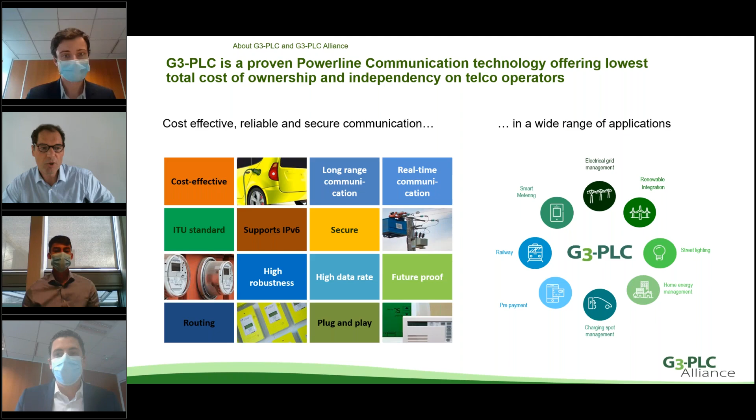On the right side of the screen, you see a couple of application areas for G3-PLC. As you probably know, G3-PLC was developed for the mass rollout of smart meters, and the main application still is in smart metering. But G3-PLC by now is being used in many other applications, such as street lighting, EV charging systems, home automation, and for example, also in railway solutions, in smart railways. And we will be talking a lot later on in this presentation about G3-PLC and smart metering.

And it's also being used to control safety lighting in tunnels. And in Italy, G3-PLC is a standard required by the Italian railway infrastructure company. And we have several members in our alliance from Italy working on these types of applications of G3-PLC.

And another example is Panasonic. Panasonic is also a member of the G3-PLC Alliance, active in this field. And they are using G3-PLC to control the lighting of railway platforms in several stations in Tokyo. So this is an example of one of the other application areas for G3-PLC.

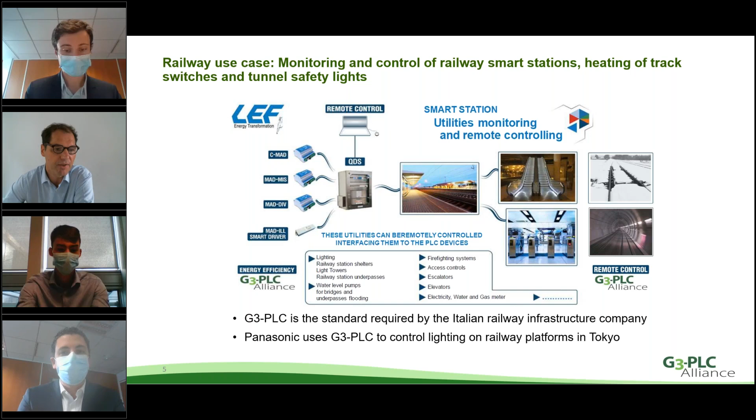Back to G3-PLC technology, G3-PLC embeds all the modern features for a long-term network operation, and it was designed for harsh network conditions. It's a very robust technology. It operates at low signal-to-noise ratios. It works with different modulations depending on the conditions in the network.

And it is self-healing, meaning that when there is a breakup or a change in the infrastructure of the system and the communication line is broken, then the nodes in the system will automatically identify this and will find a new optimal route for the communication. So it will self-heal the communication network without any interference from outside.

G3-PLC communication can easily cover several hundreds of meters, and we even know about examples of kilometers covered by G3-PLC communication. It supports high data rates. It has embedded state-of-the-art security in the protocol. It supports end-to-end IP communication. It is IPv6 compliant, and also important, G3-PLC is an open international standard recognized by the International ITU organization.

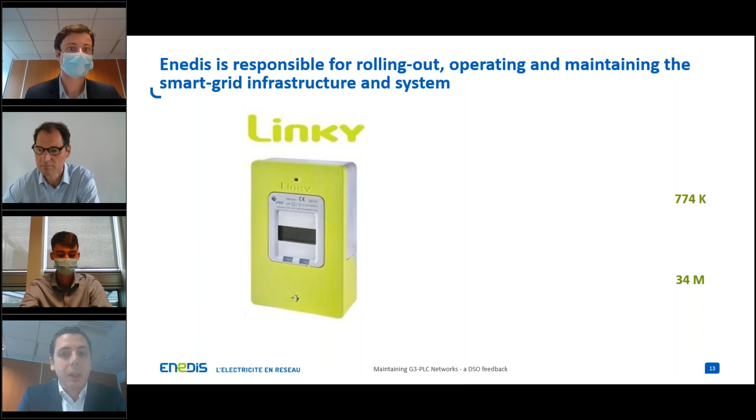Inside Enedis, Linky is the smart metering program. This is a large-scale rollout of 34 million smart meters using PLC G3 communication technology. The rollout started in 2015 and should finish in 2021 as planned. As of today, 28 million meters have already been installed at the end of last week, and 86% of the concentrators also.

We just wanted to highlight that for a massive rollout of PLC G3 smart meters, Enedis adopted a leopard pattern strategy. It means that first we install the concentrator, and then we install the meters quickly on that area to have a good saturation level and to have a good communication performance.

Also, before rolling out, there is no need to have specific noise measurement or network engineering with PLC G3. It's useless, so it is quite plug and play, in fact. And what we see is that PLC troubleshooting is usually the last thing to do to make the system work. There are many other things to check before.

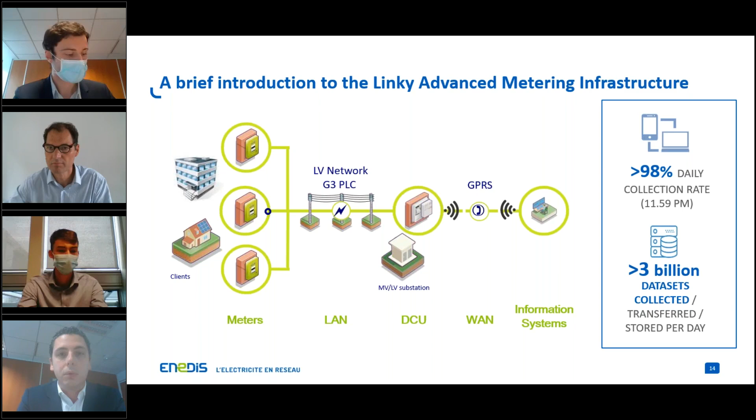So from our experience, to keep an AMI up and running, you need 3 items. The first one is monitoring. It can be a whole network supervision entity with people, tools, and processes, but it can also be lighter. The target here is to have an accurate monitoring of the services and all the technical components of the AMI.

Then you also need on-field intervention, because at some point you will need to get your hands dirty. Interventions can be prepared to be as quick and efficient as possible, and technicians will make field measurements with appropriate tools and take adequate actions.

And finally, you need expertise and knowledge management. You need a feedback loop with what was observed on the field to a team of experts who ensure level 2 support. Feedback is used to help improve knowledge, such as possible PLC perturbations and disturbances. You need to improve processes, such as the automated remote troubleshooting system that we have in France, and also training programs.

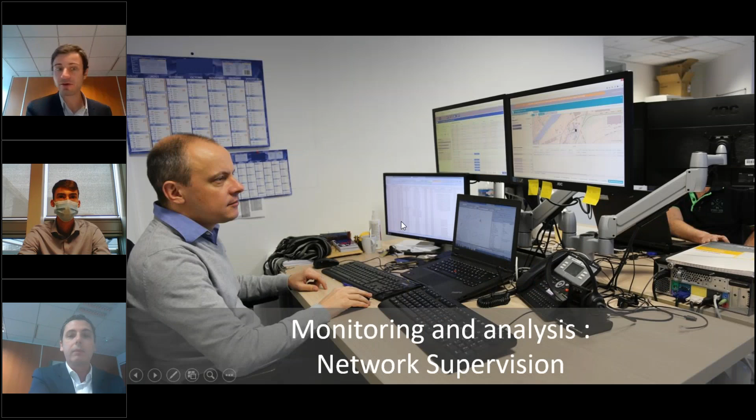Okay, so our first step in PLC troubleshooting and for many other issues is to monitor and analyze remotely our AMI networks. This photo is one of the local supervisors who use our Linky supervision system and try to match information with our GIS. I want to show you today how we are organized and face the communication issues, and especially PLC issues when we meet them.

First, we need to understand what we are monitoring and for what. On one hand, we have a technical architecture that Nicolas just explained to you. This system can send alarms and many data that we treat as soon as possible. For example, if a DCU sends an electrical failure and stops collecting, we are going to send a tech before a remote operation is asked or before a customer claim.

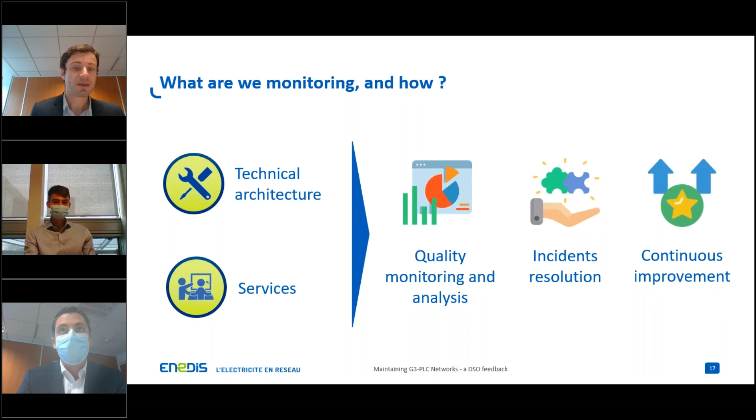As you know, France is a quite big territory. We need a global monitoring, but we also need people who are close to the field. That's why we decided to split the responsibilities.

The Hypervision Control Center manages the global performance of the AMI and leads the supervision centers. They have administrator rights and can upload parameters and new updates, for example, firmware or DCU software. They ensure the national consistency and they treat large-scale incidents. For example, they can be in touch with a mobile network operator during an incident.

And the regional level actors plan and realize the maintenance. They take care of the customer and supplier services and guarantee the database accuracy. In each region, there is one or more technicians trained in PLC troubleshooting, and we will focus on them later. It's important to understand that this organization was made during a rollout phase, so we decided to not clean the network before that.

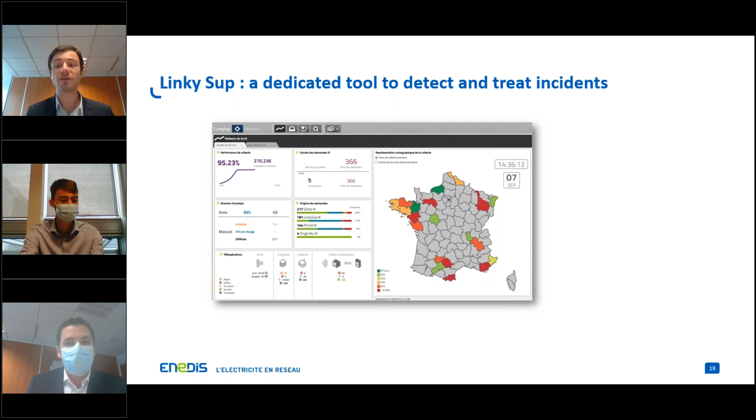The objective is to provide the supervisions all the information to investigate, for example, the cartography and customer services, customer address, etc. From the software, we can send the case to the right service, depending on the situation. It can be PLC troubleshooting, but also hardware maintenance, etc.

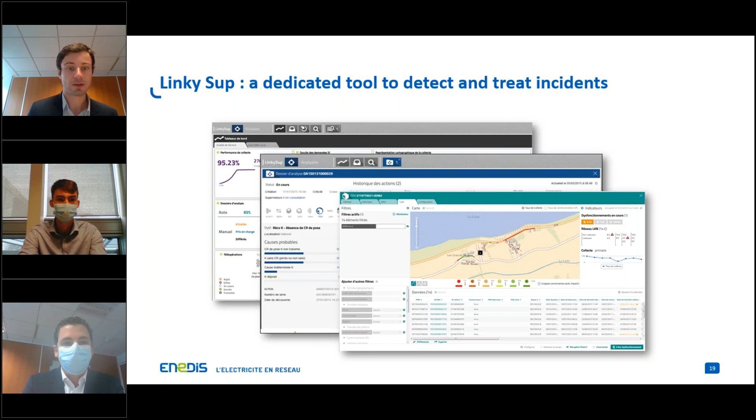So now on field interventions. The first step is to go on the field and to solve the issue. What we do is we train people for PLC troubleshooting. We have around 60 local technicians on each regional office. They work part-time on this PLC activity. It's important to say that because it's not enough to work with them on a daily basis. So they work between 1 or 2 days a month on this activity.

It's a good career opportunity for them. They need to be specialists. They are not telco specialists, but they need to have a good experience in Enedis, in customer services. They need to be curious, and they need to want to solve issues. They have a training of 2 or 3 days. It's an in-house training, and also practice. They practice in an experimental network.

The training is 3 days, and we started this activity in 2016. One of the feedbacks is that we don't need to start too early. You need to have a few meters installed in the field because if the technician doesn't practice, he will lose the skills he learned in the training.

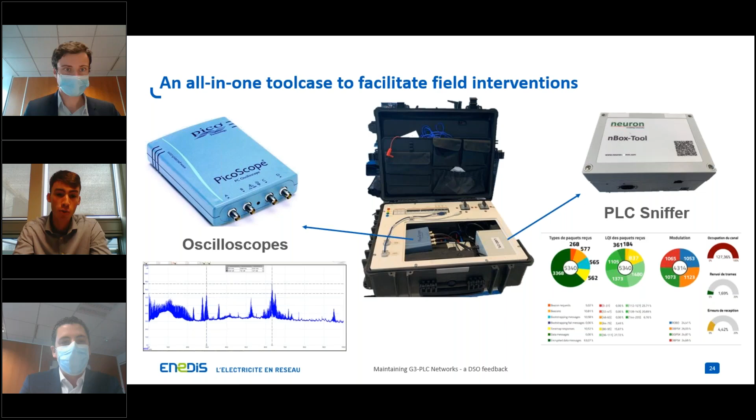All right, let's talk now about expertise and knowledge management, which is more my work because I work on a national team at the Enedis laboratory. So here are the topics that you will need to focus on to develop your expertise. At Enedis, they are managed by a national team in Paris. We use field feedback to design and provide improvements. So the first topic is the device performances that are impacted by the noise and their own performances.

Secondly, the parameters, that depends on your use case and sometimes your electric network. Third one is the service that you need to perform on the system, such as grid services, for example. Then we help developers to automate some detection analysis on Linky Sup. And finally, we use feedbacks to improve the training of the technicians.

So now let's focus on the first two topics, the device performances and the parameters. So first of all, at Enedis, before the rollout, we really focused on the device performances. It's really important because it will give you an easier rollout because the device will be immune to the noises and have better transmission capacity.

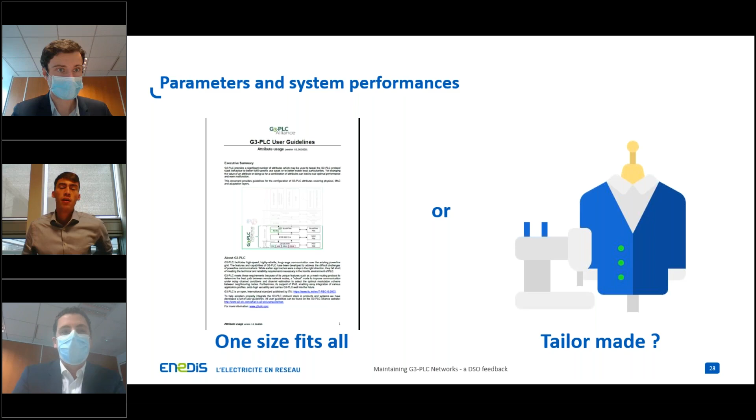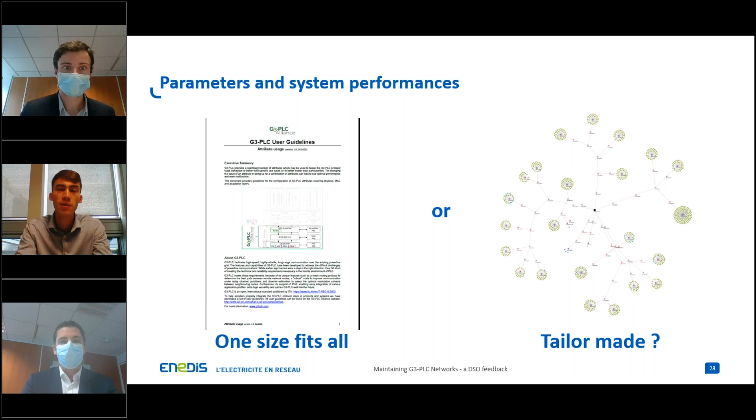And then some specific cases might require parameter tuning. And in order to do that, you need to have your parameters remotely accessible through your HES. We will see that during the case studies.

Okay, so now I want to show you a few cases that happened on the field. I will start with the first one, which was in Évry, a city near Paris. We detected 7 DCUs with very, very low performances, even though the saturation was very good. All the substations were located in the same district, and each cluster was between 100 and 250 meters. All the DCUs were reachable, connected, they sent messages, but the communication was close to zero.

So we investigated with the supervision team. Oh, sorry.

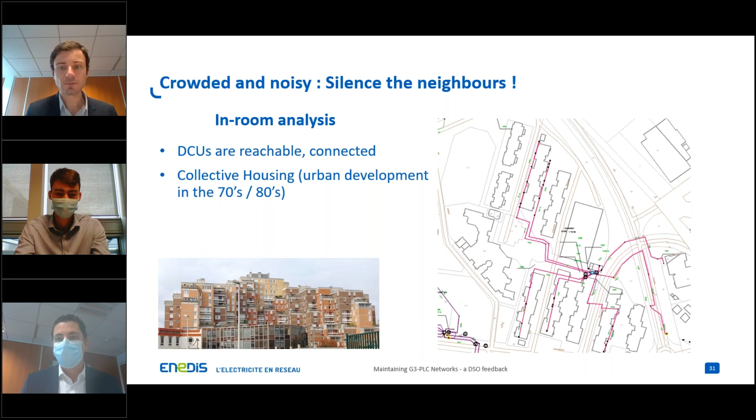So in this city, you will find a lot of building bars from the 70s and 80s. The density is quite high, as you can see on the cartography of the first substation. So when we checked the customers, we found a boiler room, and it was our main hypothesis. So we went on the field with the team and all the tools.

First, we made the measurements close to the DCU to capture the noise signature. As you can see, the noise is quite powerful, and the DCU was not able to communicate in PLC. We made the same measurements close to the suspected origin of the noise. As you can see, the noise gets more powerful close to the boiler room. You don't see it, but we made many measurements to check that. And so we called the company to get an appointment with a technician.

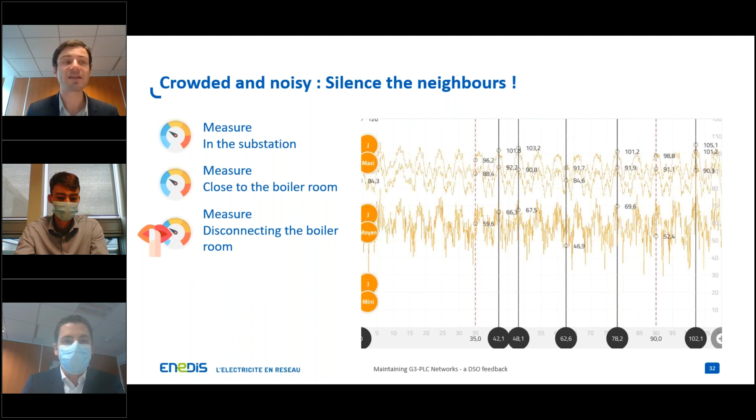The last thing to do is to confirm the hypothesis. And for that, we briefly disconnected the boiler room, and the noise disappeared. After a few discussions, we found out that the boiler company disconnected all the low-pass filters behind the frequency variator. So after reconnecting all the filters, the performances went up, and so we closed the case. So this is the first example of what you can face on the field.

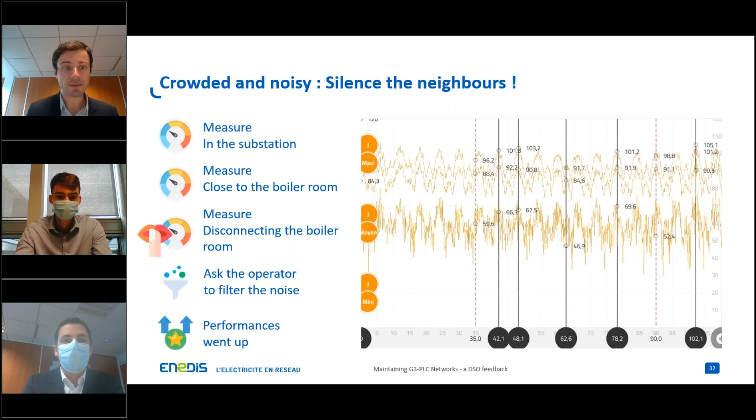So the area is a new neighborhood in Paris, close to a brand new subway station. As you can see, the buildings are modern and they all have solar panels. We saw that the saturation ratio was not good enough in some areas. That means that the PLC network may not be strong enough to face noise.

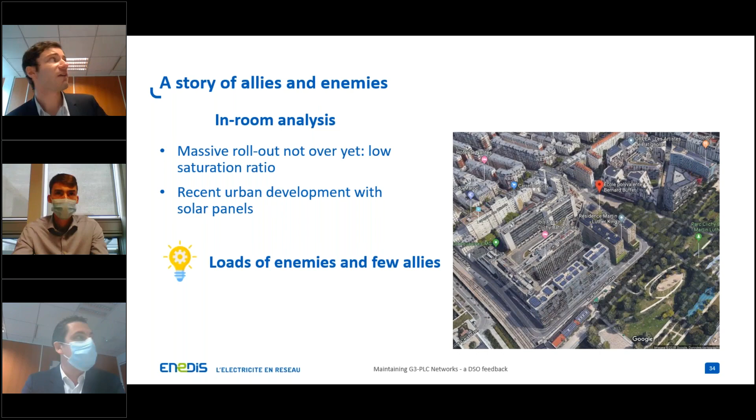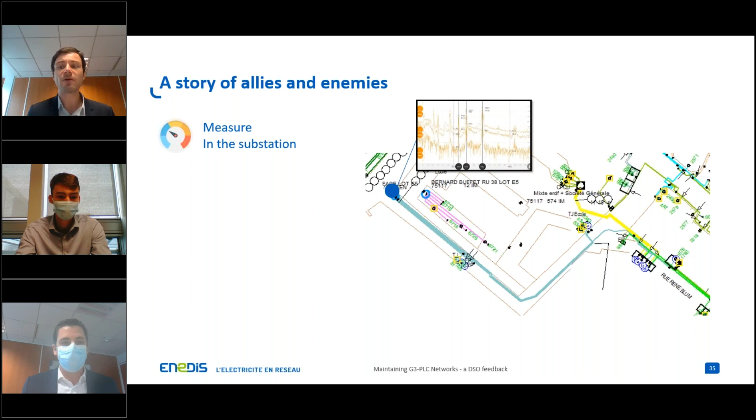So we did the same protocol as Évry. We went to the substation to check that everything was fine with the DCU. We thought that the noise looked like an inverter noise from a solar panel. So we confirmed that with the second measurements in the elementary school equipped with the solar panels.

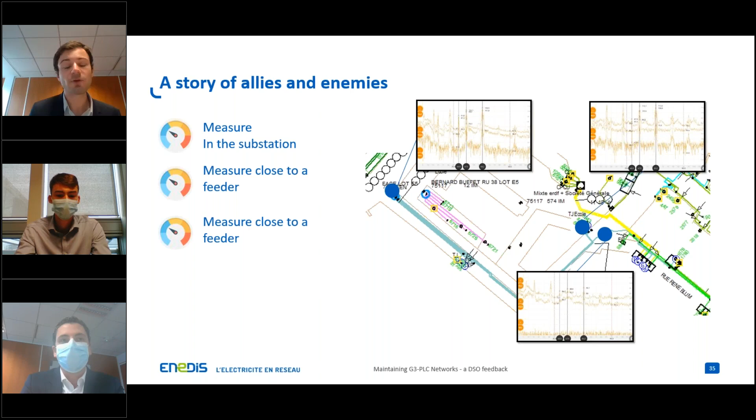The last measure was to go on the customer building located on the other feeder. And so we saw that the noise was still there, but not powerful enough to avoid the loss of communication. That means that we don't always have to remove the nodes to solve a case. It's very important to say that.

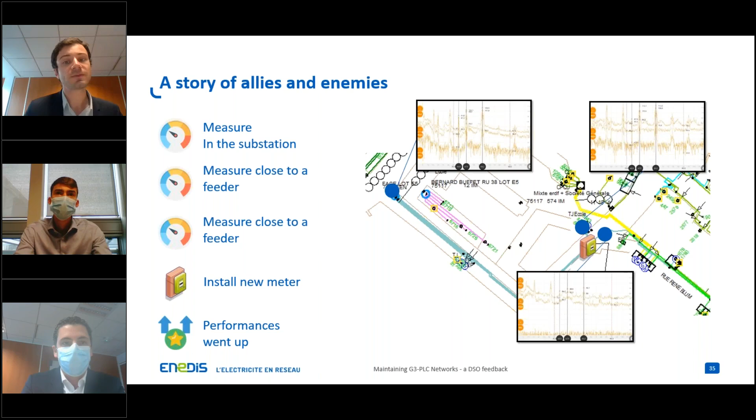So what we did is we installed a new Linky meter at the ground floor of the building. And so with that, we improved the saturation ratio locally to make the PLC network more efficient. And so the day after the installation, as you can see, we had an improvement of 41 points of the daily data collection rates. It was still not perfect, but we asked to put more meters on the building to improve the performances again.

All right, for the third use case, let's focus on a network with 800 meters. Back in the time, that was the biggest network we had fully deployed on our system. So this network had really bad performances, even if it was fully deployed and all the meters were installed. So in order to improve the performances, we firstly put a G3-PLC analyzer near the DCU, to have good knowledge of what happened on the network.

Then we also performed a DCU log analysis. And with the collective work with the technicians, the supervision, hypervision, and the G3-PLC expert with our tools, we developed and proposed some software optimization and parameters modification to have better performances. So the performance went up from 20% data collection rate to 90% data collection rate.

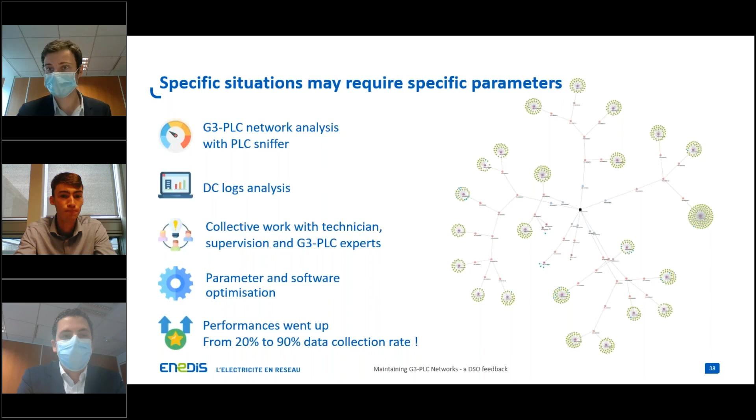So to sum up, maintenance and troubleshooting are vital to maintain equipment and infrastructures up and running and ensure services are delivered. G3-PLC, as any communication system, is no exception to that. Monitoring is essential to detect loss of performances, both technical performances and service performances. You need to listen to your client, and you need to analyze before sending technical teams on the field in order to make their intervention easier.

On-field interventions fuel a feedback loop to improve knowledge, training, and so on, and make future incident resolution easier. Troubleshooting can be easy, and some actions can be automated. As Thibaut said, there are automated reboots, upgrades, kicks, and so on. So you need to let your teams focus on trickier situations.

And finally, we haven't mentioned it so far, but troubleshooting can be outsourced. Although this is not how Enedis is managing it right now, it is also reversible. For example, in India, EDF is ensuring maintenance for 7 years of a smart metering system, and the target is to hand it back to the customer, to EESL, after 7 years of maintenance from us.

So that's all for us. If you have any questions, we are ready.

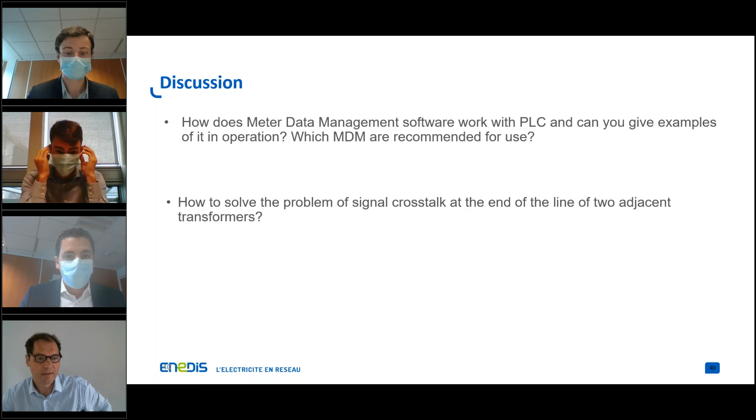Another interesting question posed is about the back office required. Can you say anything about the average number of people you would need in the back office and in the field, maybe, for example, for 10,000 smart meters?

Yeah, I can answer that. It's a very interesting question because the maintenance team in Enedis is integrated in the technician fleet of Enedis. So with remote operations, we save time for this maintenance. So we don't have more technicians for this maintenance. And for the supervision, I think you don't need to check only the number of meters, but also the number of DCUs that you will monitor.

I can't give you a precise number because it will depend on the tools that you provide, the objectives that you have, and also the performance of the AMI system and the meters and the DCU. So we mainly face hardware issues, software issues. PLC maintenance is not the main activity of supervision. It's only a small part, but sometimes some cases can take time. That's why I don't give you an average number.

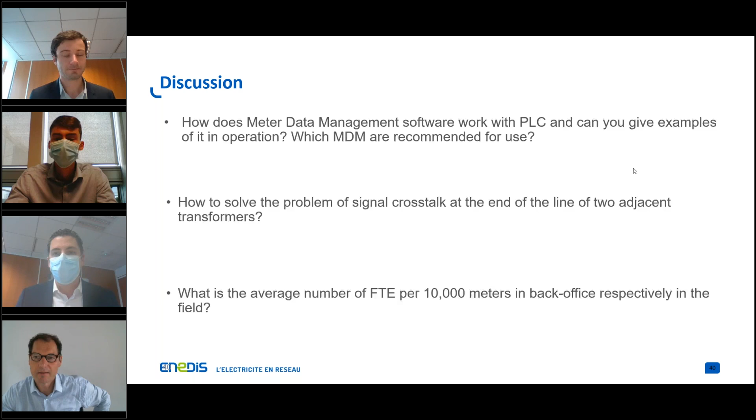Let's see. Another question, also quite technical, I think. What kind of issues do you expect, or what advice can you give, when you have multiple data concentrators on the same low voltage network?

Okay, yeah. So the main issue is, of course, that your DCUs cannot be synchronized. The G3-PLC network doesn't synchronize the two DCUs on one network. So there might be conflicts of bandwidth use. So the main advice, if you really want to put multiple DCUs in one LV network, is to really put them at different places, not collocated or near each other, because they might lead to bandwidth conflicts.

Okay, I hope that answers the question. Otherwise, please let me know in the question box. I'm looking at the questions. Another one we already got. I think this one we got before the webinar.